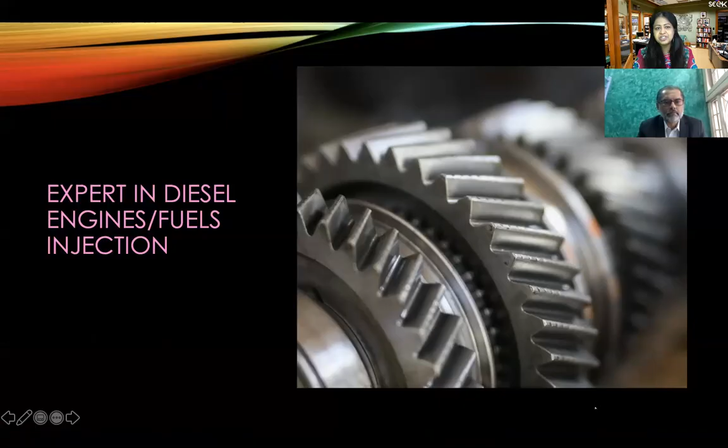He has authored and co-authored papers on the subject of diesel fuel injection systems, and he is considered an expert on diesel engines and fuel injection. He has participated in several panel discussions and has a keen interest in the cause of education, having been on the academic council of Hindustan University and also participated in syllabus compilation meetings at Anna University, Chennai.

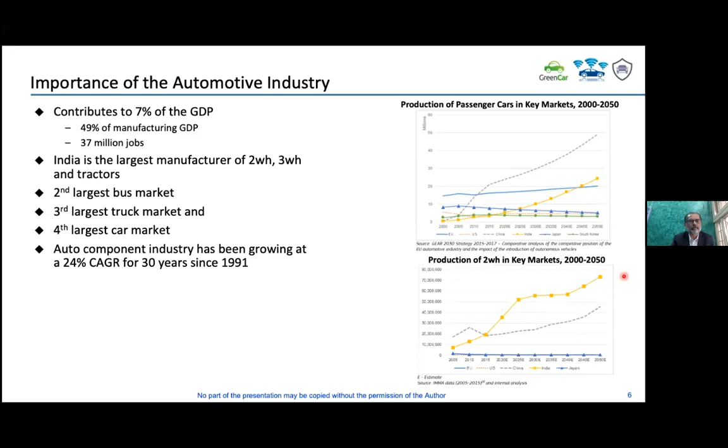Does it mean that everything is fine? No, there are certain things we need to understand. The transportation industry, what we call the mobility industry, is changing very rapidly. Now, what are the mega trends? Mega trends mean things that work together, enablers, macro trends that help you move forward.

What are they? Clean emission, better performance or electrification, and the drive to move further—autonomy, communication, etc. You'll notice three small icons at the top of my screen; they'll appear on every screen. These icons refer to green, connected, and safety. These are the three themes that will be there worldwide for any number of years going forward—not just today, but forever. That's why I've chosen to keep that, to remind us what we as a world are trying to achieve.

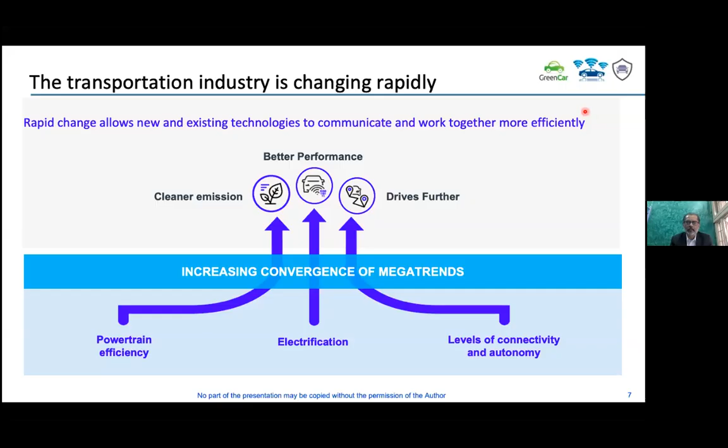It is not uniquely different—everybody is trying to achieve the same thing. How we do it is what changes. Everybody wants cleaner emissions; we don't want to leave the world a dirtier place than what we came into. All of us have responsibilities as citizens of this world to leave it as clean or better than we found it. That's why we talk about cleaner emissions. Performance means using fuel more appropriately, not polluting, not wasting, reusing—so many things. And then, are there better ways of doing things, drive further? These trends are all converging together as we go forward.

If you look at the major technology-driven disruptive trends, as you see in the title - disruptive trends means something which disrupts the flow. You are expected to operate in a certain way, but suddenly things are not going the way you want because it has been disrupted. These disruptions are good, some are not good, but mostly going forward it will continue to be good. There are many disruptive trends on the automotive side: emissions, diverse mobility, electrification, autonomous driving, connectivity. These are the major headlines which are disruptive trends affecting how the automotive industry is going to move forward. I will explain all of them in my subsequent slides.

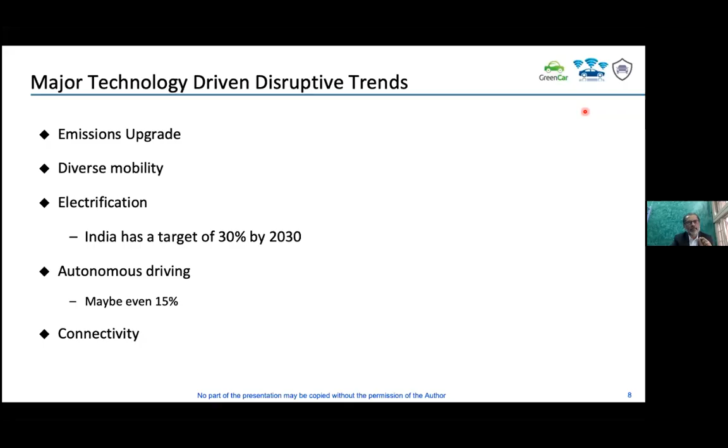Thank you. Okay, emissions upgrade - this is the biggest disruption as far as automotive technology is concerned. Now we come to the topic of emissions: measurement of vehicle emission. What are the pollutants that are regulated? People know that what goes in is a carbon fuel - you take either diesel or petrol, gasoline as it's called. It's basically a hydrocarbon mixture of various combinations. You oxidize them with oxygen, which is burning them, and what comes out is carbon dioxide plus power plus a lot of pollutants. Not everything that comes out of the exhaust is regulated. The pollutants which are regulated are four: HC, hydrocarbons; CO, carbon monoxide; NOx, oxides of nitrogen, various oxides like N2O, NO2, etc., collectively known as oxides of nitrogen; and PM, particulate matter. These are the four pollutants which are measured and regulated.

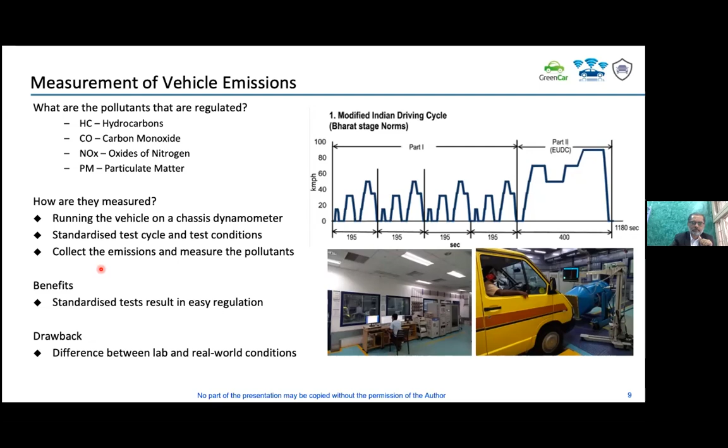If you look at emissions in India, it started as early as 1984. It was a Bombay Motor Vehicles Act for Maharashtra. Then in '89 we had free acceleration smoke being limited, '91 smoke being limited, '92 gaseous emissions, '96, etc. These are all just numbers and dates, not important. The important thing is it started as early as 1984. In other countries it started much earlier, but to be fair, India was not making too many cars at that time, so these things were not very important for all of us. There are things more important than this.

Now, what are the norms? India follows the European model, meaning the test cycle and the limits we use are taken from the European model. So you have an equivalent, like European Euro 1 is called BS1 or Bharat Stage 1 in India. So if Europe today is Euro 6, India is Bharat Stage 6. As I told you in my previous slide, the pollutants regulated are hydrocarbons, oxides of nitrogen, carbon monoxide, and particulate matter.

I've shown the progression of emissions here. This was the window for BS2, this is the window for BS3, this is the window for BS4. A couple of years back, India boldly declared that we are not going to go step by step into BS5 or Euro 5 — we are going to jump straight to BS6. So that's what we did. We went from BS4 to BS6, and you see the window has become very, very small. When I say the window has become small, it means the limits are very tight, and meeting those limits is going to be tight for all of us.

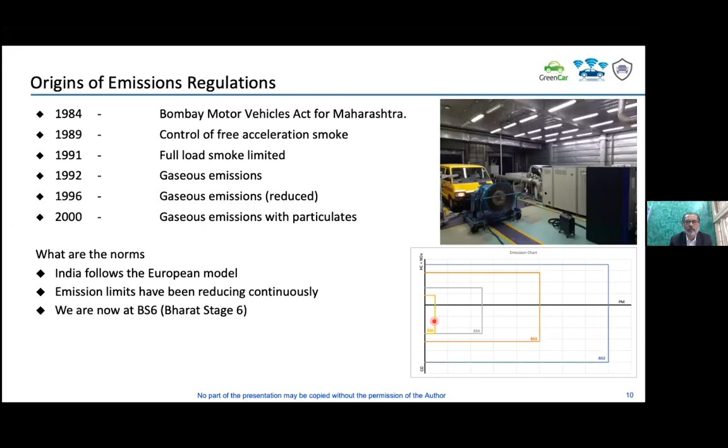Okay. Sorry, somebody, can you please mute? You carry on, I'll take care. Yeah, okay, Dr. Usha, how do I remove this note that I get about this meeting? It's right in the middle of the screen. Now it's better for me, I was not able to see it.

So this is the progression of the Indian emission norms. We talked about BS2 and its window. These are just two pollutants I've taken for diesel vehicles, and we are here today in BS6 in 2020. So since 2000-2001, the oxides of nitrogen pollutant from a vehicle has been reduced by 89% today, and if you look at particulate matter, it has been reduced by 94% today. So you can say India has come a long way since we started emissions regulation.

Vehicles have become cleaner. You might still be thinking, what am I saying when I see vehicles belching out smoke? If you don't maintain a vehicle, obviously it will continue to perform badly. But if a vehicle is maintained well, we have made significant progress in the last 20 years, going from BS1, BS2 to BS6 today, and today we are not far away from Europe.

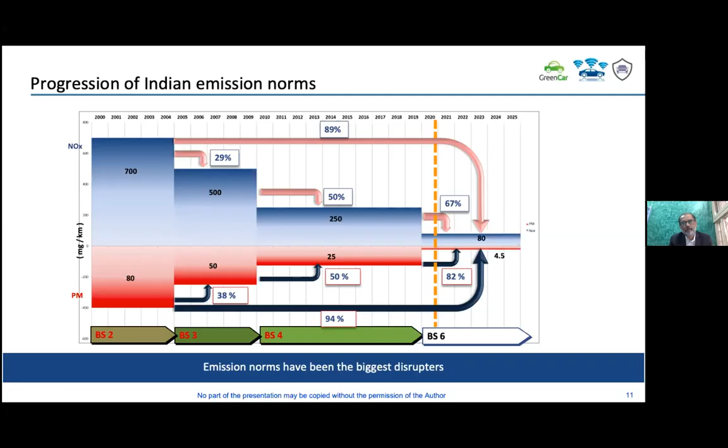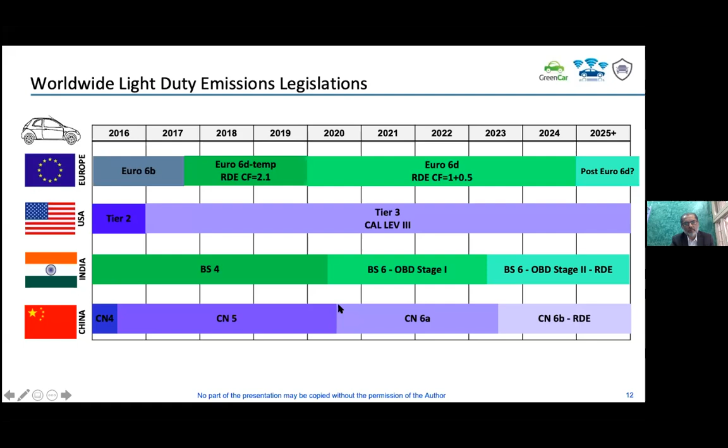If you compare emissions worldwide in 2020, this is where we are today — India started BS6. Europe started Euro 6 much earlier. USA is at a different norm, but since we follow the European norm, it's better for us to look at that comparison. So effectively we are now catching up with Europe, and going forward the difference will be only about 3 to 4 years between India and Europe. This is a very big achievement considering we are a developing country compared to Europe, a developed country. China also has its own set of norms — China is now at what is called CN6A.

Is that the only requirement? No, it's not. Vehicles also have to pass two other requirements. One is known as OBD, onboard diagnostics, and the second is RDE, real driving emissions.

We'll talk about that later, but more importantly, vehicles as they are being produced are becoming cleaner, as I told you here.

OBD, what does it tend to do? It tends to help you maintain the vehicle over a period of time. If there are any problems, it will immediately report it.

Real driving emissions - remember I said one of the drawbacks of running a vehicle on a chassis dynamometer recording emissions is that it leads to some difference between the lab and the real world. RDE is expected to bridge that gap.

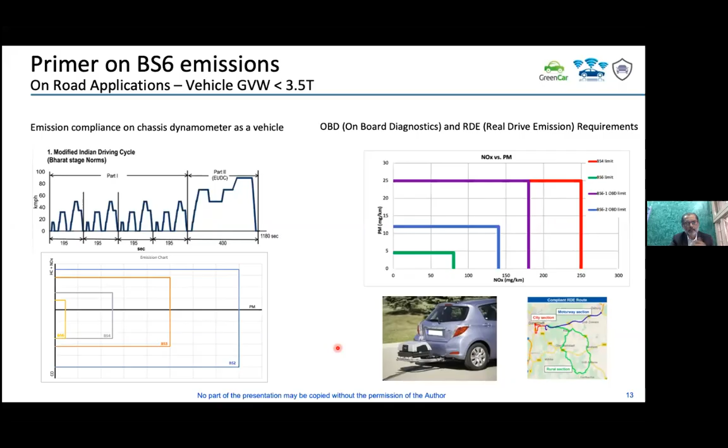Now, I talked about BS6, I talked about the pollutants, I talked about the limits, etc. Now, how is all this achieved?

As it passes through the diesel oxidation catalyst, the hydrocarbons and carbon monoxides go away - they are oxidized, becoming carbon dioxide and harmless. So what remains is PM, particulate matter, and NOx, oxides of nitrogen.

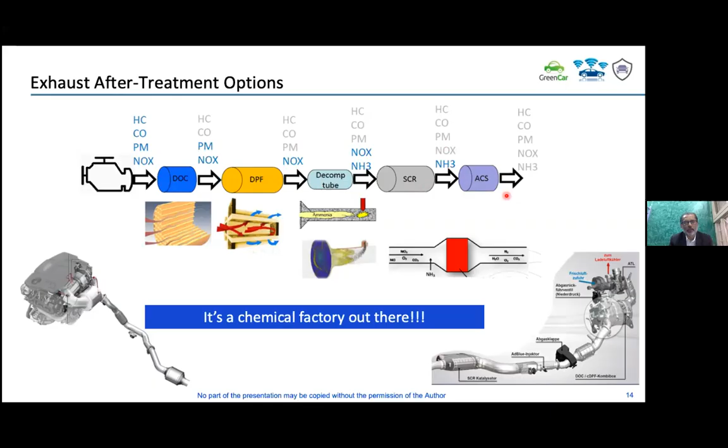It passes through the SCR catalyst. NOx gets removed, NH3 remains. You remove it through the oxidation catalyst. Now, all what I'm saying appears to be very simple, but it is a bit complex. A lot of work needs to be done by development engineers, R&D engineers to make it all work. But this is how simplistically it works, just for your information.

Now, I said we need to talk about 3 things which are required for the vehicles to pass through. One was emissions, I mentioned. Second one I said was onboard diagnostics. Then I said RDE. We'll come to that later on.

First, onboard diagnostics. What is onboard diagnostics? You can understand already there are 3 words there: onboard, which means on the vehicle itself. Diagnostics, all of you can understand, is to check the health, like you do health diagnostics. It is a feature that allows detection of any malfunction.

You've got so many electronic sensors, actuators in a vehicle today. They're all connected to a control unit. If any of them malfunction, meaning do not work well, do not work the way they're supposed to, they will lead to increased emissions. If they lead to increased emissions, the very purpose of clearing the emissions, starting production, is lost. You don't want to do that. You want the vehicles to remain as good as what they were at the time of production.

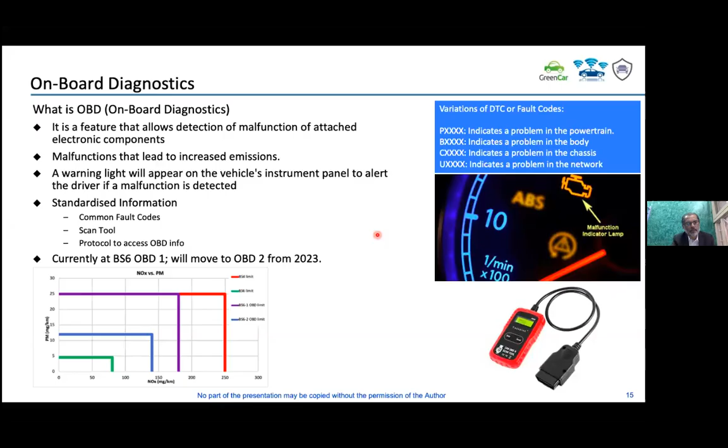Next, real drive emissions. What is this real drive emission? As is obvious from the title, a car is driven on a public road under various conditions. You install equipment on the vehicle that actually collects the pollutant data, measuring pollutants unlike anything we did in the past. The testing agency fits what is called a portable emissions measurement system in the exhaust system of the vehicle, runs the vehicle on a public road, and checks whether the emissions are still within limit or not.

The vehicle is run at different altitudes, different temperatures, different speeds, different types of roads, and then you measure the emissions. They have come up with rules so people are able to measure it correctly. They say a trip should be a minimum of 90 to 120 minutes, and there should be certain limitations on the road, what speeds and temperatures you drive at. This is the European norm, because we adopt from Europe. This is what Europe is following.

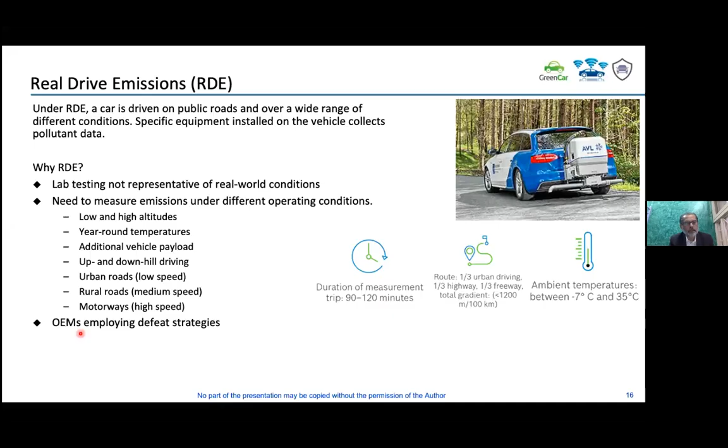So what happens is it becomes a defeat strategy - you are defeating the purpose of emission regulation. You regulate it in a particular way, but you drive in a different way. To avoid all that, people have come up with this RDE requirement where you have to test it on the road as well and certify it.

Our temperatures, our operating conditions, our speeds are different. So what we have done is taken information from Europe and modified it quite significantly in terms of the operating conditions to which the vehicle has to be tested, and what speeds we operate at. For example, in Europe low speed means 0 to 45 kilometers per hour, whereas for us it's 0 to 35, because in Indian cities speeds can be significantly lower. High speed for them is more than 80, for us it is more than 55. So you take information from Europe where the model is working successfully, and adapt it for India.

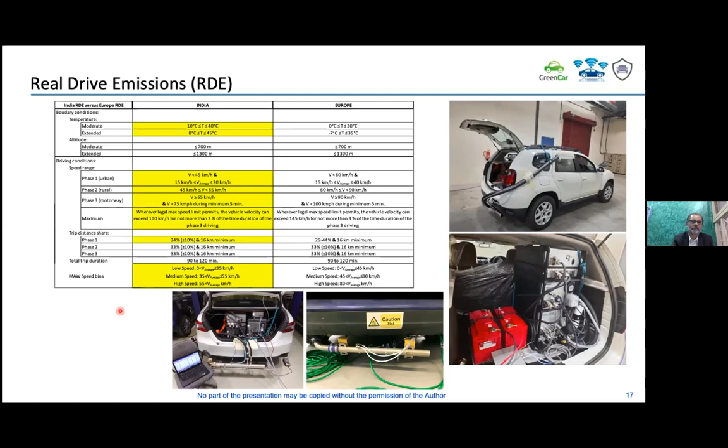So we talked about emissions, we talked about OBD, we talked about RDE. These are three requirements for certification of BS6. Now, is that the only thing? As far as emission is concerned, yes, that is the only thing. But what other norms are there?

There is something called the CAFE norm. What is CAFE? CAFE is corporate average fuel efficiency. What is the purpose of that? The purpose is to reduce fuel consumption - simplistic answer, it reduces the fuel consumption.

What you do now is, just as you have a norm for emission reduction, you have a norm for fuel consumption. You say the fuel from a vehicle should not exceed this number. How do they measure this? Similarly, they do it on the cycle only. They run the vehicle and measure the emissions and fuel consumption. They use CO2 as a proxy, they don't measure fuel economy directly. They use CO2 emissions from the exhaust as a proxy for measurement. So you know a CO2 number in grams per kilometer, and once you know that, you can convert it into fuel economy. Simplistically speaking, higher CO2 means higher fuel consumption, lower CO2 means lower fuel consumption.

Now why is all this important? As I said, it helps reduce greenhouse gas production, which means reducing global warming. Additionally, for India especially, it helps us reduce the import of crude oil. We import tons and tons of crude oil, so this will help us a lot to reduce fuel consumption.

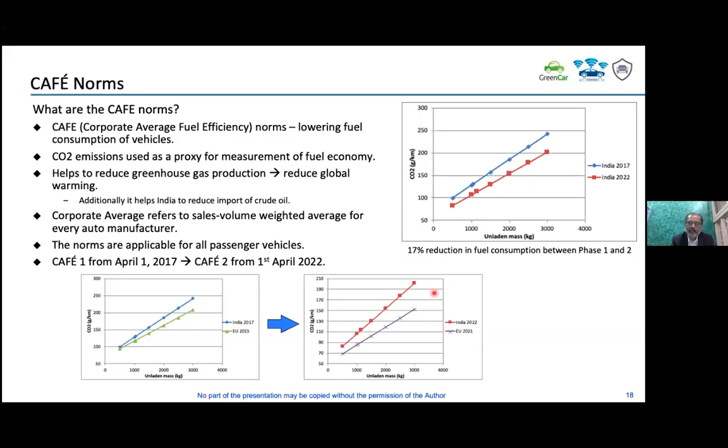This is 2017, this is 2022. What is coming next? Between 17 and 22, we are going to see a 17% reduction going forward from phase 1 to phase 2. But how does India compare with Europe? If you take the norms existing today, Europe 2015 and India 2017, EU is in green, blue is India. India continues to be higher than them, meaning we allow more fuel consumption compared to Europe. This difference actually becomes bigger going forward. India 2022 is not as stringent as Europe 2021. We are catching up, it will take some time, but we'll catch up there.

So we talked about fuel consumption, emissions, OBD, CAFE norms, RDE, etc. Now what happens with diesel engines? CO2 benefits, why have I put it here? Because CAFE norms impose a certain penalty in Europe. Like you have a limit, and once the limit is exceeded, every vehicle manufacturer has to pay a penalty.

Coming forward, from Euro 2021 next year onwards, the vehicle manufacturer in Europe will pay nearly 14 euros for every gram of CO2 above the limit. I repeat, for every gram of CO2 above the limit, the vehicle manufacturer has to pay 14 euros. If he makes millions of vehicles, you can understand he has to pay 14 times millions for every car he produces. It is huge, it is a big penalty we're talking about.

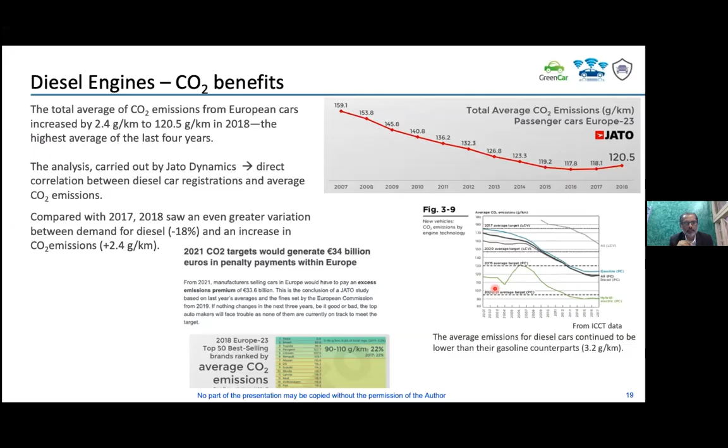Now, what we see here is diesel engines, by their inherent nature, are very thermally efficient. Typically, the fuel consumption between a diesel and a petrol engine, diesel engines are better by about 15 to 20%, even going forward with BS6, Euro 6, etc. So typically, having a diesel engine in your mix of vehicles will help you reach the target.

Now, people have worked out how much CO2 reduction has happened over the last so many years. For example, take 2009, I'm talking about Europe because in India the penalty system has not started yet - it will also come, but this is only a forerunner, an example for us to understand. In 2009, the vehicles produced had more than 5% less CO2 compared to the previous year.

If you look at 2016, vehicles produced or sold that year produced 1% less CO2 than the previous year. But you'll see in 2017 it actually went the other way, meaning vehicles manufactured and sold in 2017 produced more CO2 compared to the previous year.

One reason was diesel sales started reducing, and the impact is straight away seen in the global fleet. When you have a reduction of diesel vehicles being sold, automatically the global fleet average CO2 increases.

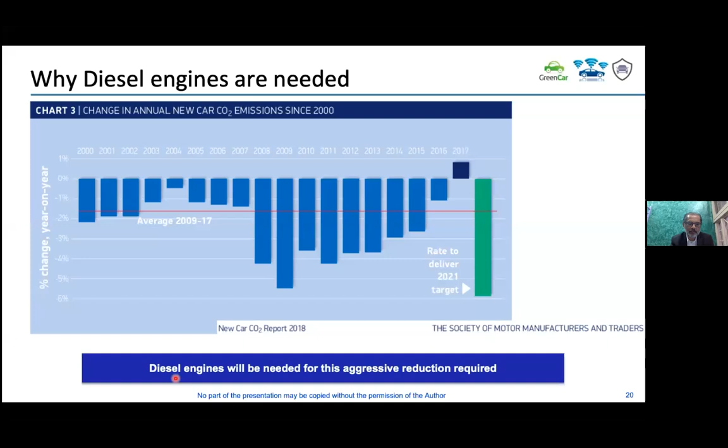From 2018, I'm talking about 6% every year. This is very, very aggressive. And the only way to do it is to have more diesel engines in your fleet, and that's what we will see going forward also. Okay, I think we're running short of time, so I'll try to skip a few slides.

It's just because IC engines are not going to die in the near future. Don't ever think IC engines will die. IC engines will continue. If there are mechanical engineers or combustion engineers out there, you can continue to be happy. IC engines will remain.

Many consultants have done a lot of studies. What do they all show? They show yes, electrification is coming in some form or the other, and vehicles will continue to have a different mixture. But even in 2030, which is 10 years from today, 80% will still have a combustion engine. Here we are only talking about pure electric vehicles - everything else has some form of combustion engine, which leads us to the next topic.

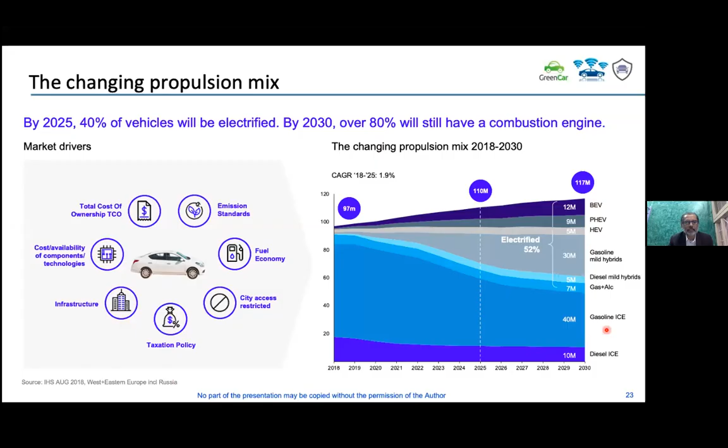So as I said, IC engines are here to stay. They will not go away. Electrification will come, but it will not substitute IC engines totally, which leads us to this next topic, which is electrification.

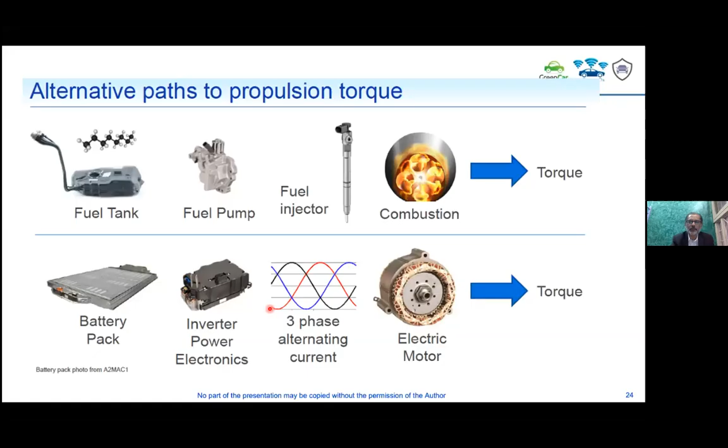There is a huge push towards electrification. Why is that happening? It's because there are regulatory norms making it difficult for IC engines to survive on their own. We talked about emission norms, CAFE norms, OBD - all this is making it very, very difficult for IC engines to manage on their own. Some form of electrification is required.

Higher battery capacity - batteries produced today have higher capacities and are coming down in price. Charge interval is increasing, and charging infrastructure is improving. In many countries you can find charging infrastructure available everywhere.

Last year, India sold only about 2,820 electric cars in a market size of 2 million vehicles. Electric vehicles haven't come in a big way yet; they are a very small population today. You can see the big disparity between the two, but it is catching up.

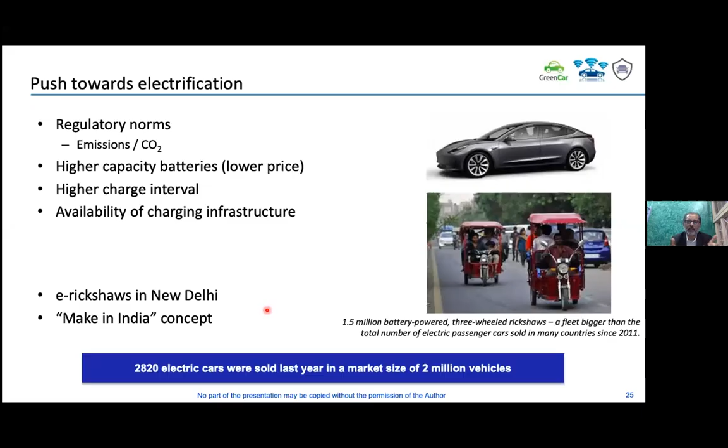There's nothing major for him to invest in, and operating costs are very low. The charging infrastructure is just his own home plug point, and the cost is not severe. It uses only a 12-volt battery, so speeds aren't great, but this is good for India, especially for a city like Delhi where pollution is a problem. Such vehicles help us in a big way. People had to be innovative and think out of the box to make this electrification concept work in India or anywhere else.

For example, in a battery electric vehicle, you can have 100% CO2 reduction because it doesn't burn anything. That doesn't mean the electric vehicle is all clean—it's just that CO2 production happens elsewhere. In a country like India, which produces a lot of power using thermal power stations, you produce CO2 there. So we're polluting where we manufacture the power, but not at the place where we use it.

So for a total or good comparison, you should do a 'well to wheel' analysis, as they say, from the time oil is taken out of the well to the wheel. In electrification too, you look from the time power is produced to the time it's used. If a country uses renewable energy, like some small European countries do, then having electric vehicles there makes a lot of sense, because you don't pollute at all—there's no CO2 production.

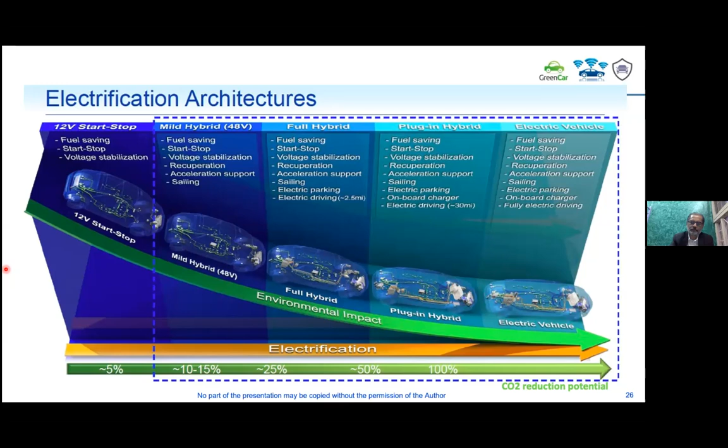This is a simple 48-volt mild hybrid structure. The system operates with a belt-driven small motor attached to it. This belt-driven setup reduces pollution, improves fuel consumption, and gives a torque boost. It also has a much smaller battery pack compared to a full-fledged hybrid structure, so it's becoming very popular worldwide.

Many European countries now run 48-volt systems. A 48-volt system actually has two systems: one 48-volt system operating a small motor, and a 12-volt system which runs the other electrical architecture and parts.

The position of the motor, in this case what we call a BSG, determines various configurations of the mild hybrid. You'll hear terminologies like P0 mild hybrid, P1 hybrid, or P4 hybrid. We don't need to go into detail, but it's only a question of where you place the motor—it can be placed here, here, here, or at the wheel itself.

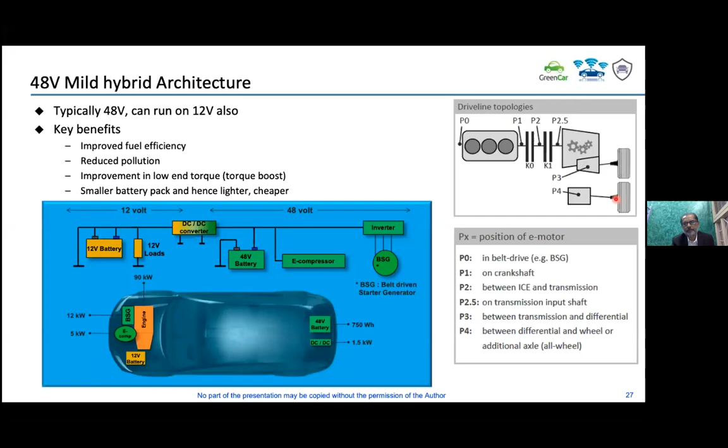As we talk about the movement from IC engines to electrification, we talked about hybrids—specifically the mild hybrid with a 48-volt system in previous slides. There are other hybrid systems available too, such as parallel, mild, series hybrid, and plug-in hybrids. The difference is only in the way power is transmitted to the wheels. In many cases, the motor and engine are coupled either individually or together, and through software and automatic clutches, you can control whether the wheels are driven by the motor or by the IC engine.

In a mild hybrid, you have only a small motor, about 10 to 20 kilowatts. It doesn't do too much—just stop-start, power assist, and regenerative braking. Parallel means you can connect the motor and the IC engine either individually or together. In the case of a series hybrid, it's also called a range extender.

The IC engine is not mechanically connected to the wheel. This is a big difference, so please remember a simple example. Parallel hybrids, whatever name you call them, are connected either parallelly or individually to the wheels. So you have an IC engine connection to the wheel, and you have an electric motor connection to the wheel.

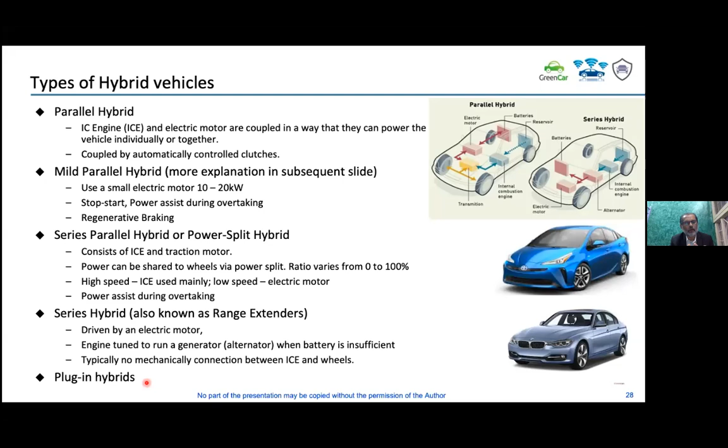There's no mechanical connection. Plug-in hybrids are the last one you see here, plug-in hybrids are a method of series hybrids. The only difference is in the case of plug-in, you have a system where you can plug it into an electrical outlet and charge the batteries. You can imagine here, the size of the battery depends on what type of hybrid configuration we are talking about.

Today, we started at 12 volt, then we talked about 48 volt. Then we are talking about higher voltages today. What is driving this higher voltage? The higher voltage is driven basically because of the size of the motor that we need. We are moving from pure IC engines, to 48 volt mild hybrids, and different types of hybrids.

Here we are moving towards a full-fledged battery electric vehicle, or a BEV as it is called, with the bus voltage at 500 to 800 or 900 or 1000 volts, etc. These are all determining the size of the motor that you can have.

Today, you've got cars which have got 100 kilowatts. You have an IC engine. You take some of these big SUVs today, they are at 100 kilowatt power. You can't use an electric motor of 10 kilowatts there. If you need to have a similar performance, you need to have a 100 kilowatt or equivalent, something which delivers an equivalent torque of a 100 kilowatt IC engine.

It need not be the equal number in terms of kilowatt, but you need to have a similar sort of torque being generated at the motor which goes to the wheels. So that is only possible if you can have higher battery voltages. As some of you must be electrical engineers also here, you must understand quickly that the power is greatly dependent on the voltage of the system. So if you have higher voltage, you have a chance of operating with a smaller envelope. You can have a bigger motor there which can drive the system.

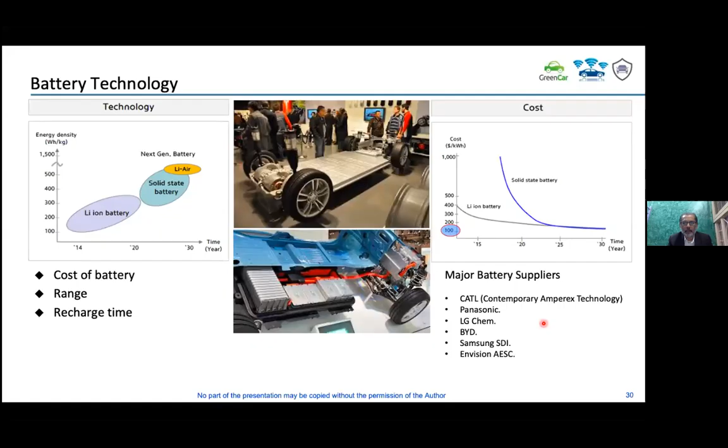So we talked a lot about IC engines, we talked about hybridization, we talked about electric vehicles. We now talk about autonomous vehicles. We'll quickly go through all these things because we need to talk about more important topics also here. We're running out of time, I know.

Autonomous vehicles. What is the meaning of autonomous vehicle? Autonomous vehicle means there is no person to drive the vehicle. It can automatically drive on its own. There are various levels of automation possible. There are 6 levels actually, starting from level 0 to level 5. Level 5 determines actually the highest level of automation, which means no human interface at all. The vehicle will move on its own. It will stop on its own. It will do whatever you want it to do.

And you've got algorithms, you've got software sitting inside the vehicle, very powerful, very strong software sitting inside the system, which actually tells you what to do next. When you see this, what to do next. I have information coming from my LiDAR here. I have information coming from my camera here. What to do with all the information is managed by this software sitting inside. Very powerful software. When I say software itself, you can imagine the people who are leading this have to be something to do with software.

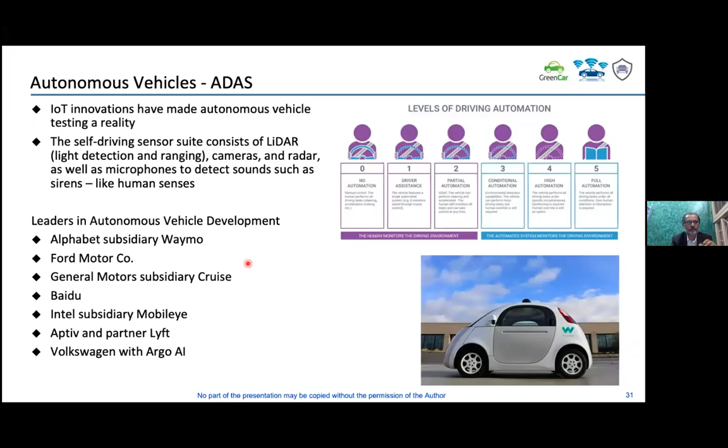The next big trend is connected vehicles. So we talked about electrification, we talked about autonomous driving. The next big trend is connected vehicles. What do you mean by connected? Connected is vehicle-to-vehicle communication, vehicle-to-cloud communication. You've got so much of data coming from vehicles.

When I talk about connected vehicles, I'm reminded of a very good story I heard. Somebody was narrating it to me a few years back. Very interesting, I will tell you that. This gentleman is from the US. He's used to very luxurious cars like Lexus etc. And he saw all this hype about Tesla. So he said, okay let's try one Tesla and go. So he bought a Tesla, started using it.

Now he went somewhere, he had a problem midway, he stopped. So as usual, as in any vehicle, you have got a number to call. So he called that number and they directed him to 2-3 people and finally landed at the desk of a lady. The lady kept talking to this gentleman and asking him, can you explain this? Can you explain that? All that. Now he thought he was talking to a call center. He's getting very upset, he's used to luxurious cars, something like Lexus etc.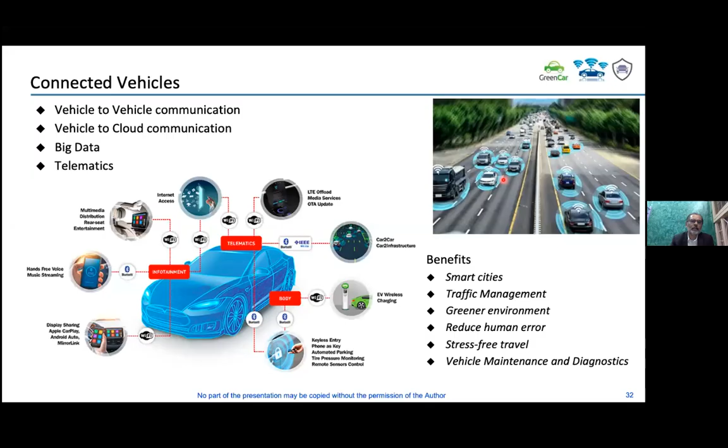Now, one reason why the automotive industry continues to progress even today is because of electronics. If we do not have electronics, we would not be continuing here. Electronics have a major role to play in the progress of the automotive industry. The embedded software we have here is high-level software, very, very powerful, very good performance. Now it'll not be wrong to say that today's car is actually a computer on wheels, and even a small car has got something like 30 or more computers sitting inside.

And then you can see some of these high-performance cars, they have even 100 microcontrollers inside, 100 computers sitting inside. And if you were to connect all of them with wires, you would need hundreds of kilometers of wire. So what do they do? They don't use that at all. They start talking to each other through a

controlled area network called CAN, like this. You don't have wires running everywhere. You have one simple connection, what is called a CAN bus. Somebody puts in information, somebody takes it out—for example, vehicle speed. So many controllers in the vehicle may read information on what speed you're running at. So do each of these controllers have a separate vehicle speed sensor? No, you have only one speed sensor, and that information is shared. One controller picks up that information, puts it on the CAN bus, and somebody else takes it from there. So you see the efficiency now.

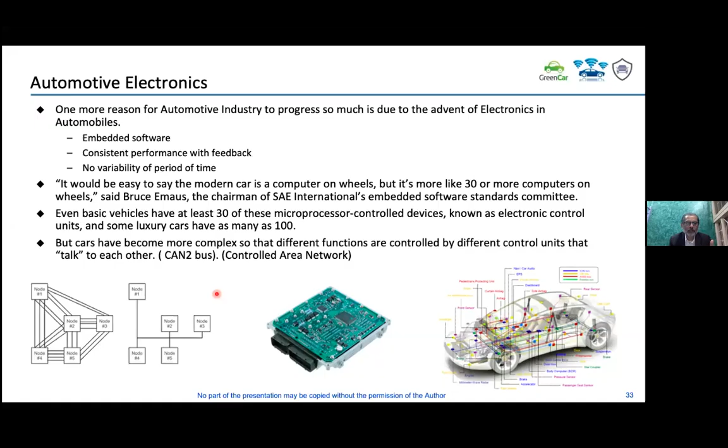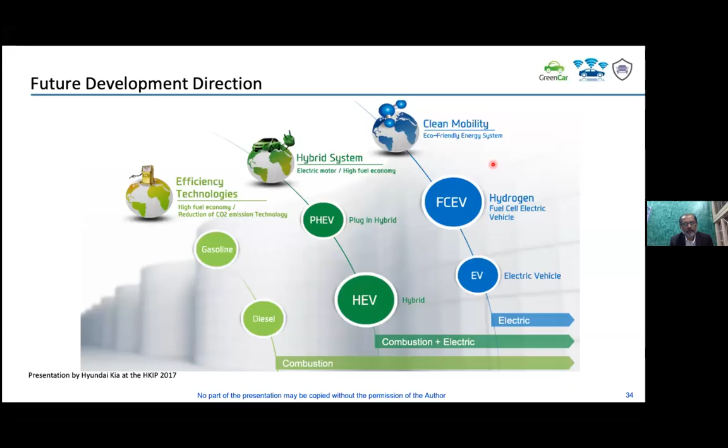This was a presentation made by a leading manufacturer a couple of years back. What are they saying is going to be the future? They're saying we are going to bet on all of them—combustion engines, which is gasoline and diesel, combustion plus electric, and also electric plus hydrogen cell. They're saying we're going to talk about all of them; we see a merit in each one, a benefit in each, in different areas, different places where they will operate. So it is to say that the IC engine will continue, electrification will come, and everything will have its place in the industry.

Okay, now coming to the last part of my presentation, we talked about emissions, connected vehicles, electrification, etc. Now, challenges. What does all this mean? New technologies coming in means new business models. You have a shift to alternate powertrains like zero emission vehicles, electrification. You need infrastructure for that, and people need to invest in that. Investors, who invests in that? Everybody needs to invest, it's not only government. Government needs to provide infrastructure, industry needs to provide R&D facilities and invest in R&D. All this is a major challenge for us.

The next major challenge is climate goals. Global warming, we talked about zero emission vehicles, reducing greenhouse gases, health challenges, particulate numbers should be low. All these are bringing about a different way in mobility.

Societal changes, I talked about it. Shared mobility - until recently, people were commonly using Ubers and Olas and everything else. After the pandemic, people are not willing to share, but I think it'll change again. We'll get back to the old system once we have a medicine or a vaccine or something like that. We'll continue to have mobility.

Today, some of the newer generation people don't want to own cars. They just want to use it as a service. That's why I said mobility as a service needs to be popularized.

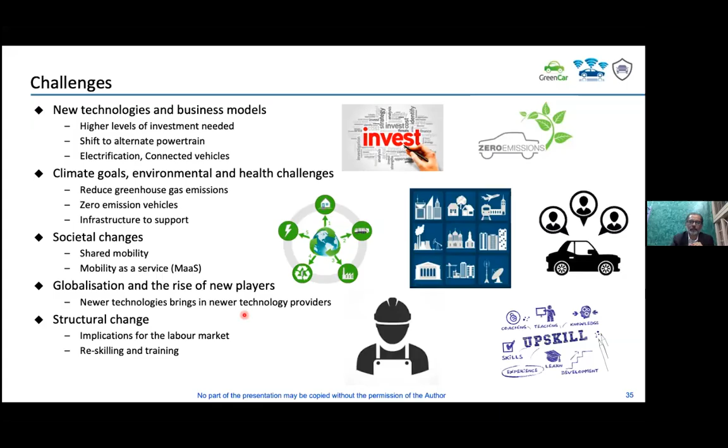We talked about the changes expected. What does it mean for individuals? For example, if you take a service like moving towards electrification, it will lead to demand for engineers with a lot of software skills. The old system of jobs linked to production of conventional powertrains is going to change if you go in for electric vehicles. Somebody said electric vehicles have got 20 moving parts compared to 2,000 parts in an IC engine vehicle. In the beginning of the presentation, I talked about 49% of manufacturing GDP coming from the automotive industry.

It also provides jobs for 37 million people, today involved in manufacturing, servicing, supply chain, and so many things related to the automotive industry. Suddenly you will find many of these jobs are no longer there. A different skill is required. People are moving from mechanical, electronics to mechatronics.

It's like cricket. A good example is cricket - T20, today's games, IPL is going to start in the next couple of days. You got T20 games, you can't get into a team if you're only a batsman, you can't get into a team if you're only a bowler. You need to be more than that. You need multiple disciplines. You need to be able to bat and bowl a little bit. You need to be an all-rounder. I don't want to say all-round at a macro level, you need depth, but you need to have multi-skills.

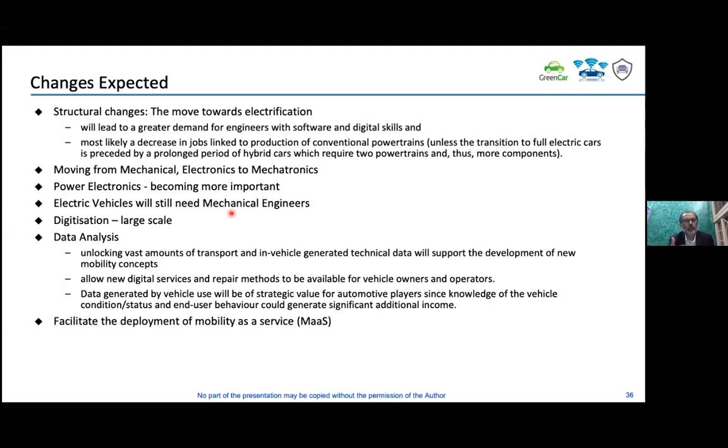So what do we need to do? As humans, as engineers, as industry, as people, it's common. It's not only about engineers or college students, it's about everybody else. We need to be able to understand and respond to trends. Today there's a pandemic, but tomorrow it will be back to normal. But normal will no longer be normal, it will be a new normal. We need to know how to respond to that.

We should be connecting academia and industry very closely. There's no use in academia working on its own and industry working on its own, not knowing what each other is doing. Invest heavily in R&D. This is for companies, government, everybody. We need to invest in R&D.

We need to translate all the knowledge that we possess into intellectual property. There are many companies in the Western world who own this intellectual property, and that's why they're charging us for everything: licensing, copyright, protection, everything they do. And what do we do? Nothing, we just buy this. It's easier for us to follow them. That's not good enough. If we have to go forward, whatever knowledge we have, we need to translate it into a product, into intellectual property that can be protected, that we can own. We need to own intellectual property if we have to become big as a country, as individuals, as a company, everybody.

Specialization in multi-disciplines, I talked about it a short while ago. Reskill people, reskill development, connected vehicles. What is the requirement for EVs? What is the requirement for connected vehicles? We need to talk about all that.

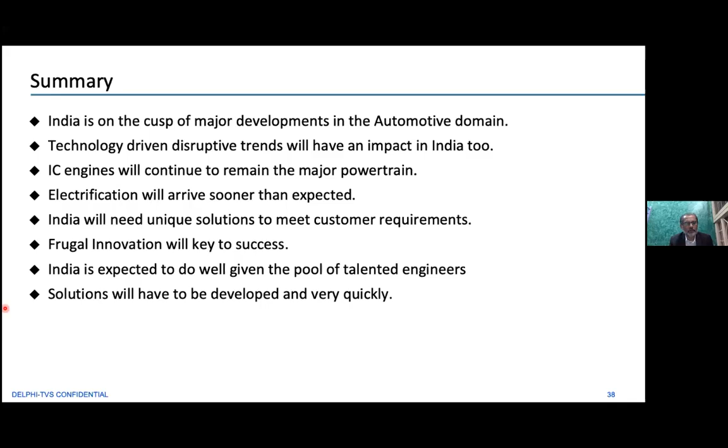That was mind blowing, really. Are you able to hear my voice? Yes, I can hear you. Yeah, it was amazing, amazing, really. I really liked it, and all the participants also would have liked it. If at all you have any questions, participants, please type your question in the chat box and also give your feedback about the session in the chat box.

Are you able to see the chat box, Viswanath? Yes, I'm able to see it. Till now, I have not seen any questions. Let me see if there are any questions I can pick up from there and answer. I know we have covered a lot of topics in a very short time, but I was just trying to give a flavor of what to expect going forward. I'm sure there could be multiple occasions when we can talk in greater detail about something very specific here.

Really, especially you were giving a lot of hope for mechanical engineering students as well as graduates, even the professors, that the branch is not going to die and they still have a lot of hope for job opportunities. Wonderful, really amazing. Very good presentation, very good slides, and the way you explained it was outstanding.